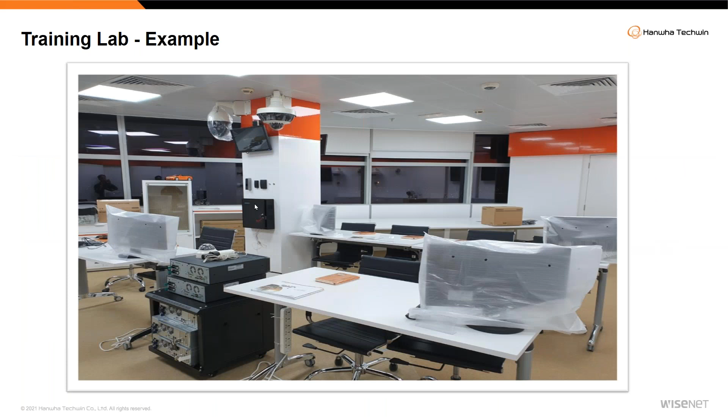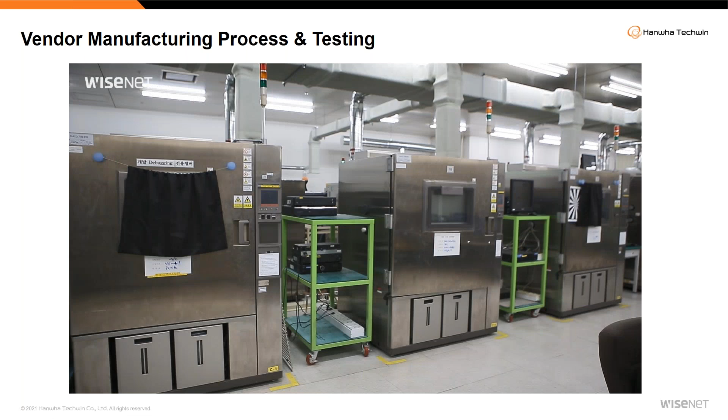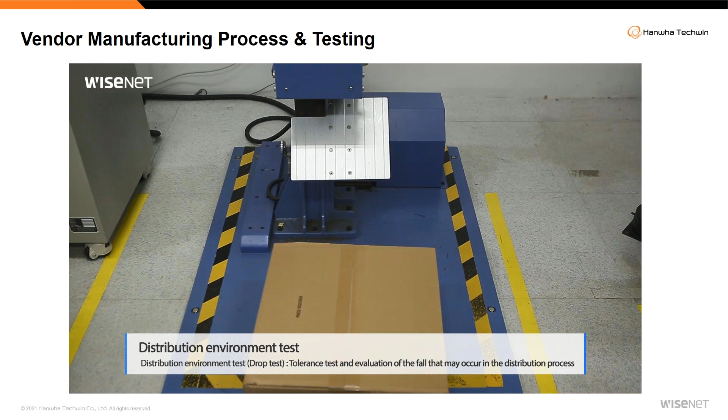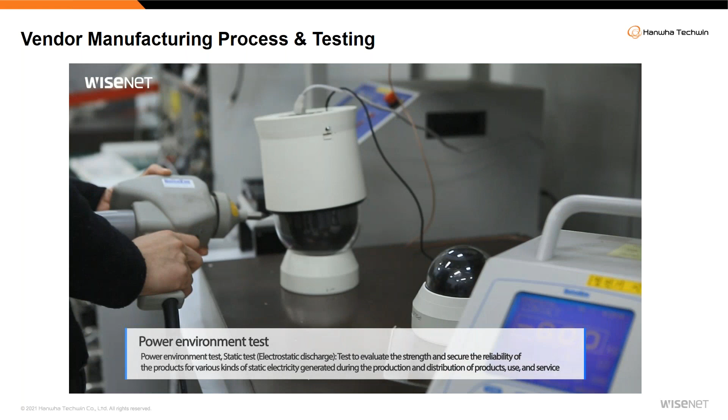Okay, manufacturing and quality reliability. This is just a video to demonstrate what tests every vendor does for their product. What you get at the end of the day is a certificate, but behind the scenes there is a drop test, vibration testing, temperature testing, surge protection testing. Then there is also power testing: when you give more power than the camera can handle, what happens?

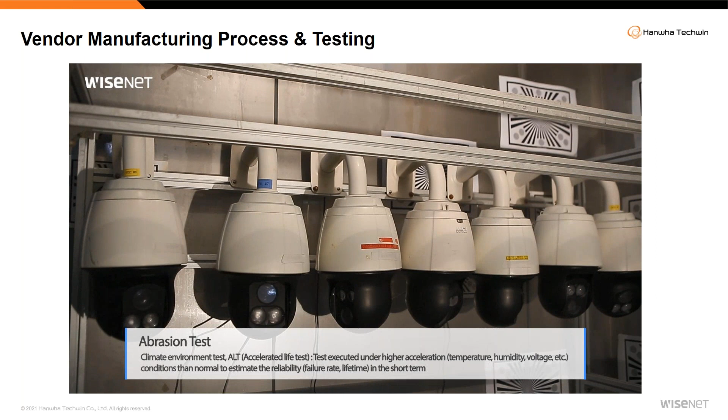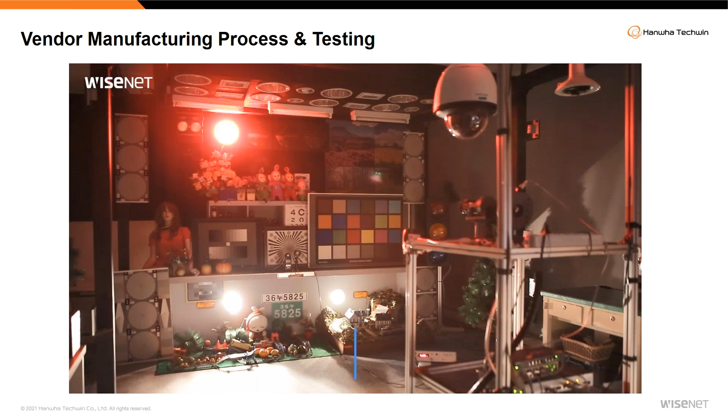Then accelerated life test is basically you keep increasing the temperature step by step and see where it breaks. Then you can see waterproof, leak test, durability test, image quality testing. All these are done by the vendor for every product. Usually these reports are available on request. It's all kept as a separate document. Very few projects require it; they will supply it. But otherwise, generally, these are the tests that every vendor does.

So definitely, you know what I mean. If a vendor is having a very strong manufacturing process, that will be seen immediately on the project. The moment you take the camera and install, you will know that the camera has gone through a quality testing.

For example, we have seen some customers say they're getting cameras dead on arrival. Some vendors are giving cameras, but when it comes to the field, it is not working. They have to fix some things to make it work. Some servers, the RAM cards are moved around during transportation. Some cameras, by wrong power, it blew, like it failed immediately on site.

So these are steps that if the vendor is not very serious, then it can have a time delay. For example, if it is dead on arrival, you have to send it to the service center to fix some things. It will take you another 3-4 days. Imagine the entire country is sending to the service center. So it will be a lot of delay, and your delivery timelines also get affected.

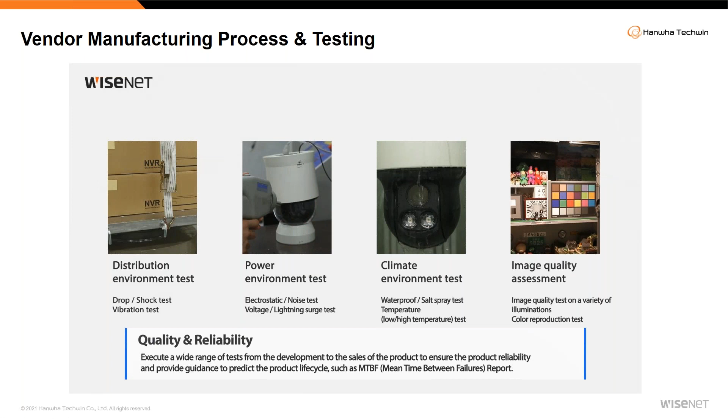So in my previous experience with other companies, I have seen these dead on arrival issues. But if a vendor is having a very strong quality check background, you can be sure that it will be fine. All right.

Okay. So, why do I keep mentioning quality process? I will just take an example of Hanwha. We have a seven-stage quality process or product development process. From the time there is a concept of the product, there is a seven-stage process. Then we have a background in aerospace and defense, where quality and precision are a fundamental part of the production process.

Then the top vendors. Okay, most of the top vendors, I mean, you can request a vendor's quality check document and other things that will give you some idea. But most of the top vendors make sure quality is very critical, because there is something known as field failure rate that is being measured by every vendor.

So this is one way: you can also ask, what is the field failure rate? Is it 1%? Is it 2%? What is the failure rate of your product? So out of 100 products, how many are bad, or how many are not working after purchasing? This is something every vendor is measuring.

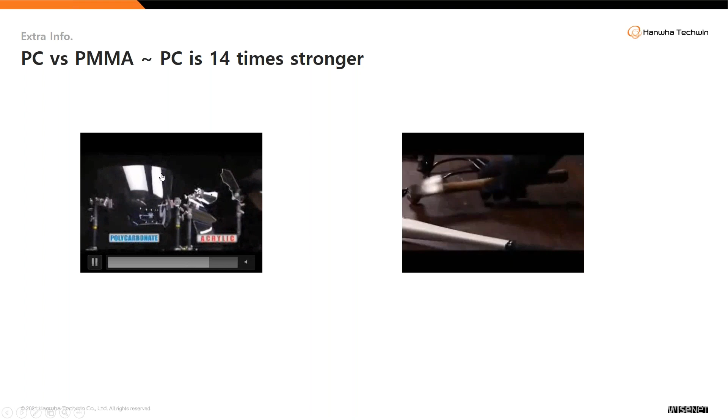So here you go. On the left side, the guy is taking a stone and using it on standard glass. It broke immediately. But if you're using a different kind of material, did it even crack? No. Now he's going to take a hammer. The first material broke. The second one, using the hammer with the same force, didn't even crack. So it's typically called polycarbonate versus standard glass.

Back in the day, glass was used, but nowadays most of the bubble part, this lower bubble, is vandal resistant, because even if a person takes a hammer with whatever amount of force he can put and tries to break the glass, he cannot damage the bubble.

That's why it's called vandal resistant. The highest rating is called IK10 rating. Okay. Next, people confuse IK10 with IP rating. There is something known as IP rating. This is different. IP rating is for weatherproof. Can it protect against water?

The second digit is for water. The first digit is for solid. Solid is what? Dust. So 66 means it is dust tight, no dust can enter, and the other 6 is against powerful water jets and heavy seas. Good enough. So anything to do with rain, IP66 is more than sufficient. So there are two ratings available, IK rating for vandal protection and IP rating for weatherproof protection. Is that clear?

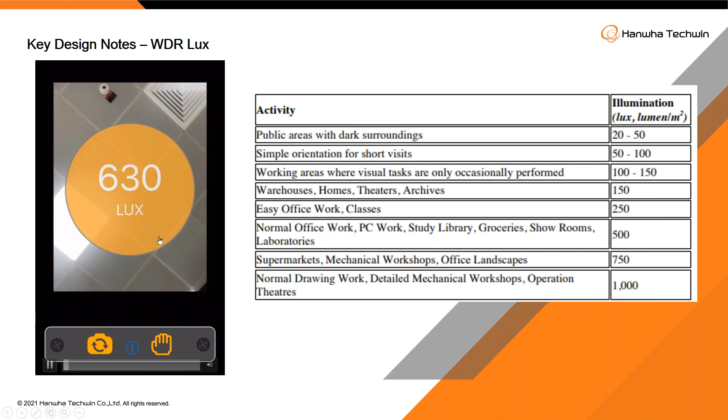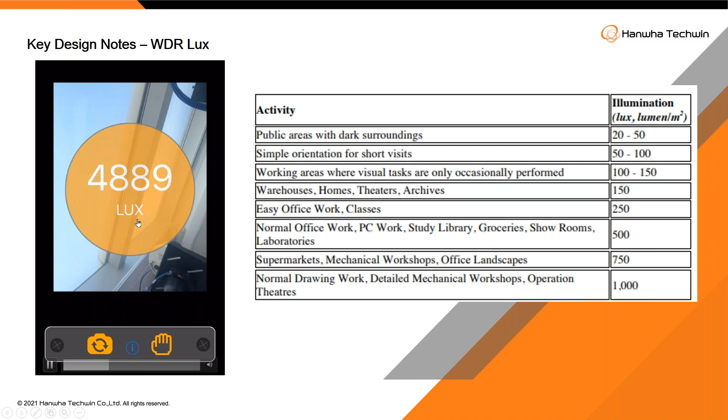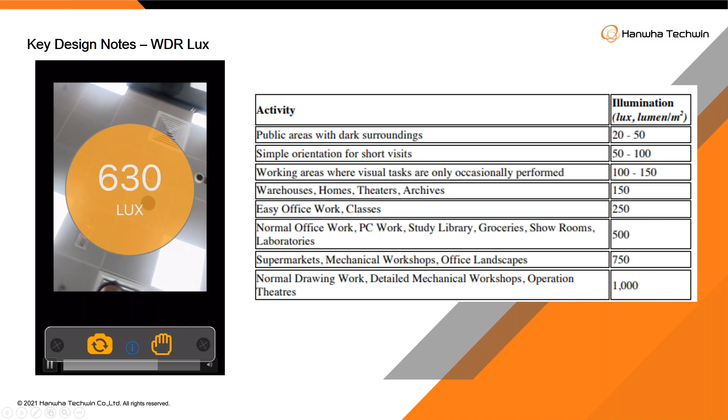So for example, if I try to measure the light level in my office, directly under the light source is around 1000 lux, but when I go to the sunlight, it is going to 10,000. So when I go near the window, you can see it is going to 10,000 plus. When I go under the table with some amount of light, it goes to 20, 30 lux like that. So lux is the measurement of light.

Now in a scene, there are two levels of lighting. For example here, in the office, there is some light, so that is some amount of lux level. In just one part of the scene, there is 10,000 lux. Inside the office, there is 500, 600 to 1000 lux. So if you see the ratio of difference between indoor and outdoor, 1000 and 10,000, the ratio of difference is very high. Then you can call it a WDR scene.

Okay, the ratio of light in the same scene. The camera is looking in the scene, that means for the camera, this is the scene. In this same scene, if there are two different lighting conditions of very big difference, contrast or lux level difference, that is a WDR scene. Then a camera needs a WDR feature, because a camera does not know which light to focus on. Should I focus indoor? Should I focus outdoor?

It does not know. So if you use WDR, it will balance the lighting and make sure you get an optimized image. So this creates an optimized WDR image by combining two frames to give a single frame. Okay. So you can see without WDR, outside is just too bright, and with WDR, you can see the details of the trucks outside and so on. Okay.

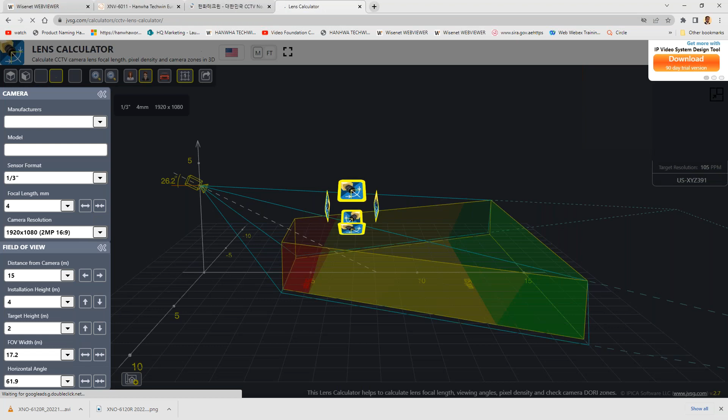Okay, now while it loads, I will also open the third party tool. So the website is called jvsg.com. Just go to jvsg.com. Then you can click on camera CCTV lens calculator. Once you go to the lens calculator, then you can see this 3D drawing. Okay, now on the right side, you can see 105 pixel per meter.

105, it is recognition. So the face looks a little bit blurry, not very clear. You can only recognize, you cannot identify. Okay, this tool is a third-party tool. You can choose any vendor, any specific model, then automatically all the details will load. But if you're not sure, you can just leave it as blank. And most of the cameras have 1/3 or 1/2.8. You have to choose. We will see 2 megapixel.

Now the guy is standing at 15 meters. The camera is installed at, let's say, 3 meters, and the person height is around 1.8 meter. Okay, these two we don't have to change. So focal length. Currently the camera lens is 4 mm. So imagine if I make it less, I can cover more wide. You can see this image becoming wider and wider.

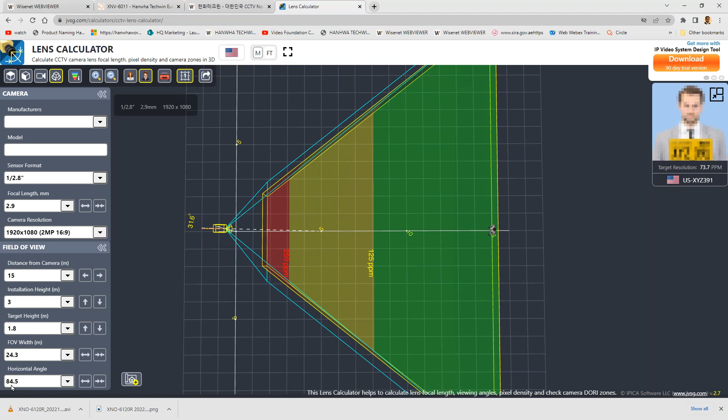Okay, so this is becoming wider and wider, and you can see the horizontal angle 84 is becoming bigger and bigger, 90° and so on. You can see wide angle. But the issue is the pixel. You can see the face even more blurry now. Target is now 60 pixel. Before it was 100, now 60. So you have to zoom in to get more pixel density.

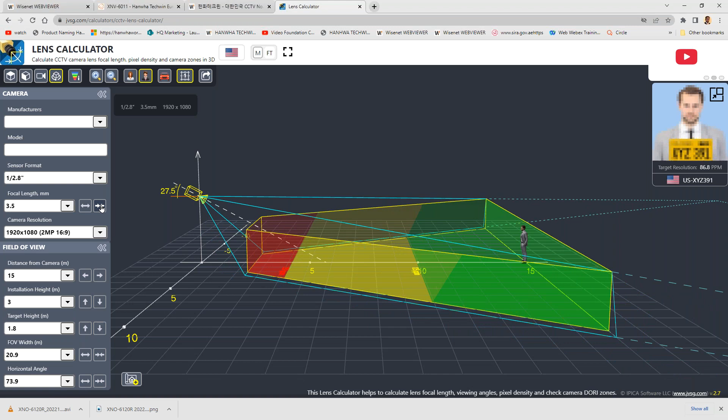So still recognition. If you want to identify this person at 15 meters, the camera should support at least 12 mm lens. 12 mm lens. Camera should support 1/2.8 inch sensor, or okay, sensor not a big deal. You need 12 mm lens and 2 megapixel resolution at least to capture a person.

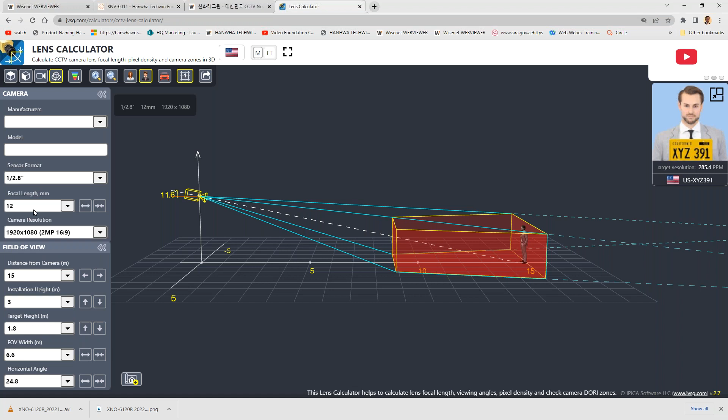Okay, sensor, by the way, it is important to the point that you should not go all the way to 1/6. These are very poor lens sensors. 1/3, 1/2.8, try to stick between these two. These are the globally available camera sensors. Okay, here 12 mm lens, then I can see the person clearly. It's identifiable, and the angle of horizontal coverage is 25°.

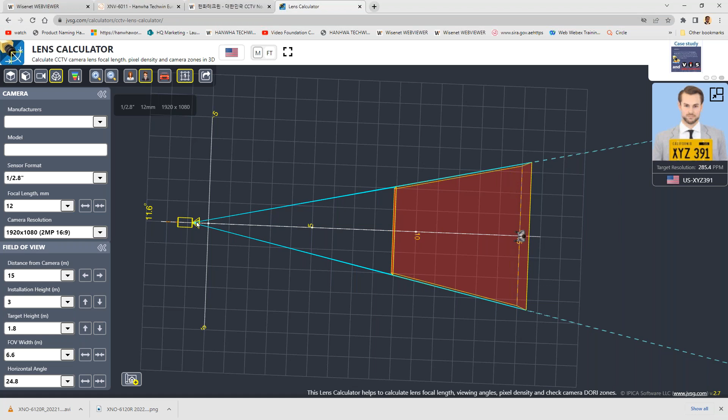Okay, 25°. What is the meaning of 25°? That means from the center of the camera you can draw a line. Above is 25 by 2, 12.5, 12.5. So this total angle is 25. So how do you draw this? You take the camera first and then you draw a line. Let me change the color. First you draw the camera, then you draw a line where the person is standing 15 meters, right? So this should be 15 meters.

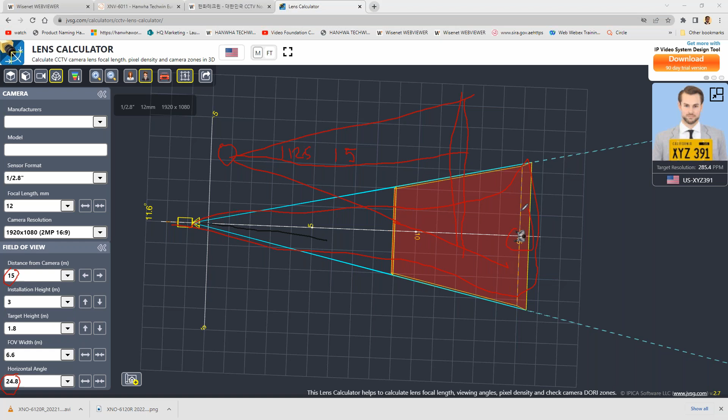After that, then you have 24.8°, so let's say 25. Here draw 12.5, here draw 12.5, and at 15 meters you cut it. Sorry, it should be here. Yeah, 15 meters you cut it. So this cone is the same thing. You take the camera, draw the center line for 15 meters where the person is standing. 25° divided by 2, 12.5, 12.5. Draw the cone. So that is the coverage of the camera.

Okay. So there is also IPVM calculator. Let me just go to that. I've not used it much, but there is IPVM calculator also. You can refer to the calculator.

Okay, let it load. Okay. Before that, Hanwha, we also have a calculator free to use. Okay. When you go to the website, just change to English, and after that, click on Toolbox Plus. Toolbox Plus. Once you go to Toolbox Plus, how do you figure out which lens to use for a camera?

Let's say my door is 10 meter. Okay, it's a bit slow here. Okay, now once you land on the toolbox, just remove all the filters. Now, take any, let's say, 2 megapixel camera, and take any camera which looks like this box. Okay, and click on map.

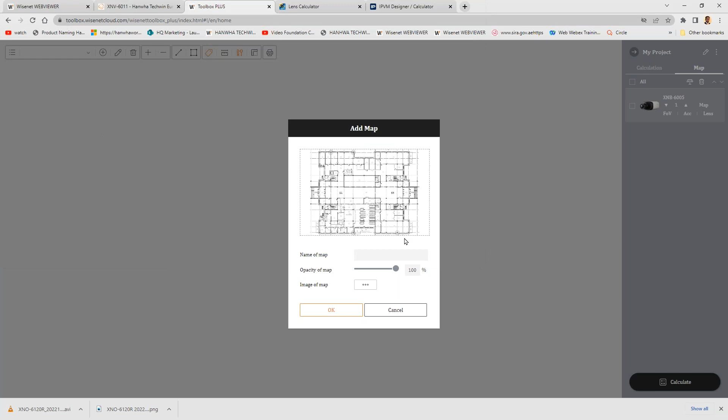Okay, now I'm going to upload a map. Let's say I have a floor drawing, desktop, first floor, and I need to calibrate the drawing. So let's say this door is 2 meters. I'm going to mention this as 2 meter. Okay, done. Now drag and drop the camera.

So at the entrance, I need to figure out what lens is good to get identification. So you can put your mouse, you can see 200 pixel, 250 pixel. Near the door it is 200, not identification. So either I can move the camera or I can try to increase the tilt angle and okay, so here, if I want to cover both the doors, I need to keep it somewhere here.

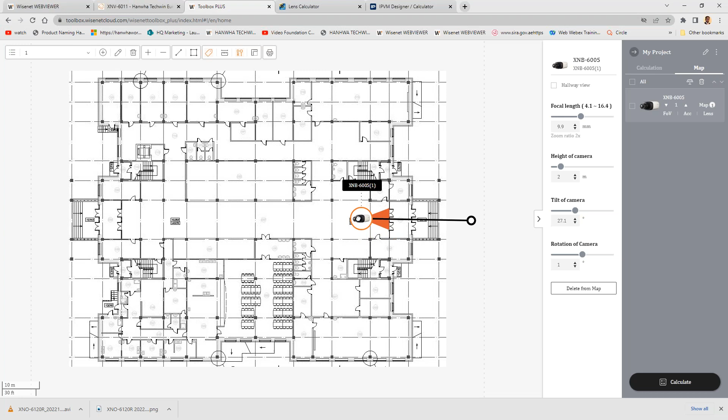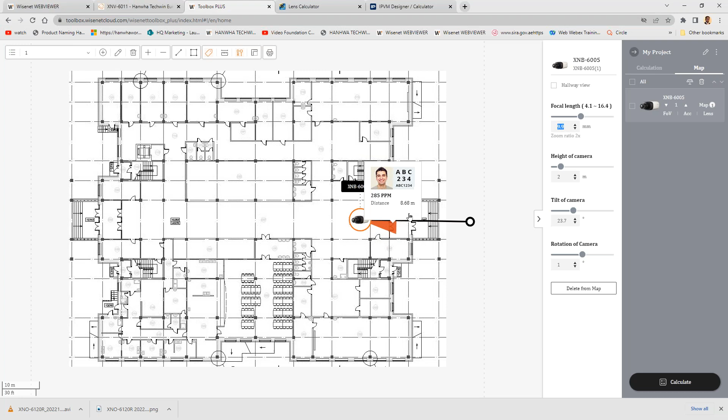Okay, okay, so here if I put my mouse, 285 pixel near the door, so if this particular camera can now look at it with 9 mm to 9.9 mm, I can get identification. Okay. There is another method, FOV. You can also do this. Again, let me go back.

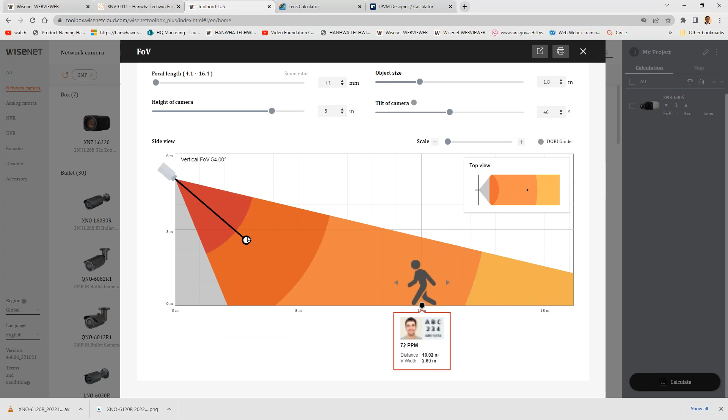And you take any camera, click on field of view, make the guy at, let's say, 10 meter, and height of the camera, let's say 2 meter. You can adjust here, and you can just drag and drop. You can check how much you can reach. So I can get 286. So 286, anything above 250 is identification.

So this is one way to check, okay, any camera with 11.5, 12 mm, I can get identification at 10 meters. So if it is 15 meter, can I get it also? Yeah, but I need a 15 mm lens for this model. So this is one way of figuring out. Every vendor will have some level of calculator like this. You can check as well. Or you can ask someone to do this and export the report and give it to you. So that can also be done.

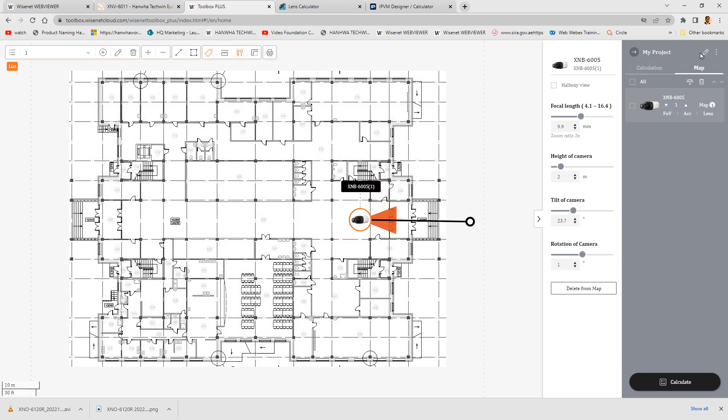So these are free tools. You can use them for your own purpose. So this mapping thing, it's free also. You can upload multiple maps and export as a report as well. All the cameras in the map will be shown and so on. Okay, so this is the concept of identification, recognition, detection. Every camera has a purpose, either to detect or to recognize or to identify.

Okay, just to summarize, we talked about working with vendors, make sure they are reputed vendors, they have global presence, they have local presence, they have tested products and project references. Then we talked about chipset, we talked about different camera components, IP66, IK10. Then we talked about the image in terms of WDR. We talked about highlight compensation. We talked about IR for zero light. Then we also talked about low light.

Then we covered lenses, fixed lenses, adjustable lenses called varifocal lens. Then PTZ camera, pan tilt zoom camera. The objective of pan tilt zoom is very far zoom to do investigation or tracking of people and so on. And then we talked about DORIS standard: detection, observation, recognition, identification, strong identification. DORIS, just the first letter of everything. The standard: every camera has a purpose, either to do detection or identification.